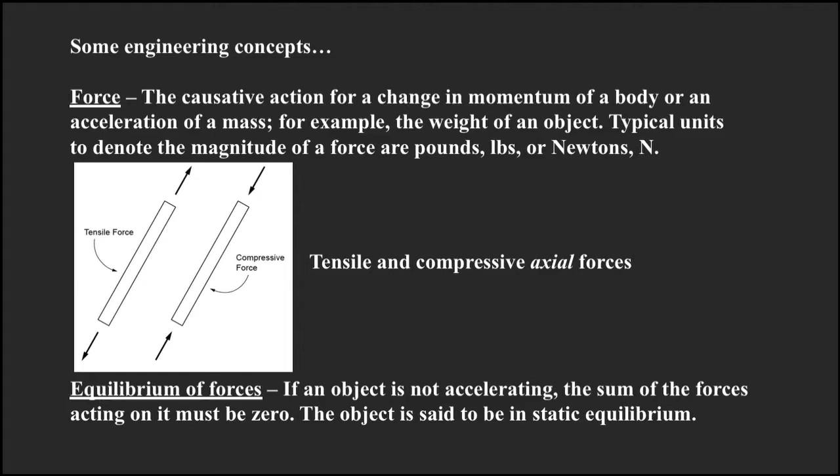A second fundamental concept is that of force equilibrium. By Newton's law, if an object is not accelerating, the sum of the forces acting on it must be zero. The object is said to be in static equilibrium.

The strength of a material generally depends on the intensity of an applied force, or the force per unit area. Stress is a force divided by the area over which it acts. Typical units are pounds per square inch, or PSI, or newtons per meter squared, or pascals.

Stiffness is an increment of force divided by the corresponding increment in displacement. Typical units are pounds per inch or newtons per meter. For example, if I apply an axial force of 5 pounds to this rubber band and it stretches 2 inches, then the stiffness of the rubber band is 5 divided by 2, or 2.5 pounds per inch.

Frequency is the rate of vibration, typically given in cycles per second or hertz. For example, the musical note middle C corresponds to a frequency of 262 hertz.

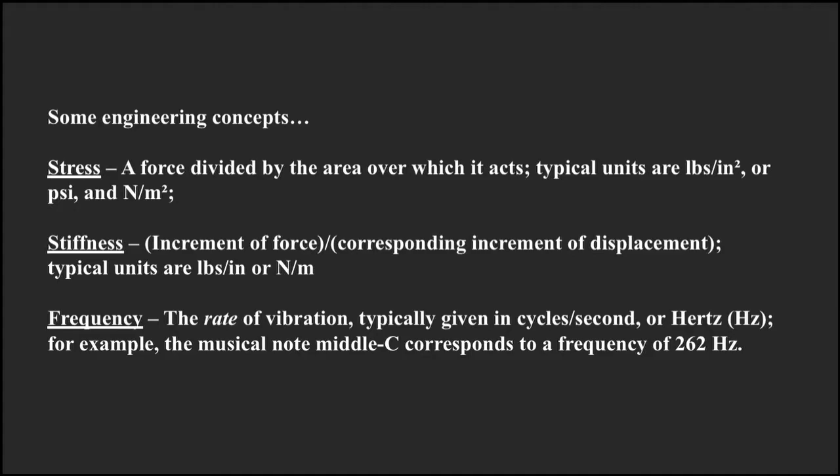Prestressing can generally be described as follows: prestressing means deliberately inducing a self-equilibrated state of stress in an object before it is placed in service.

There are many possible reasons for wanting to prestress a structure. For one, prestressing may be essential for functionality. Prestressing can improve performance by increasing stiffness, frequency, or controlling cracking. Prestressing can simplify connections. Prestressing can preclude force reversals in members and allow use of tension-only cable members or compression-only contact members. Prestressing can decrease material usage and improve the efficiency of a system.

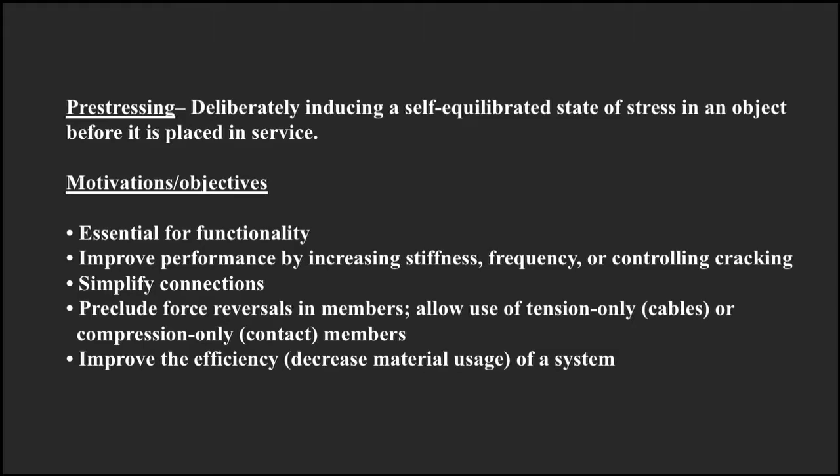Many common objects are prestressed. The blade in a traditional bow saw is pretensioned to increase its out-of-plane stiffness, generally done by twisting a rope. The net of a tennis racket is prestressed in two directions to increase its stiffness when hitting a ball. For that matter, the surface of a tennis ball is prestressed in tension by its interior air pressure.

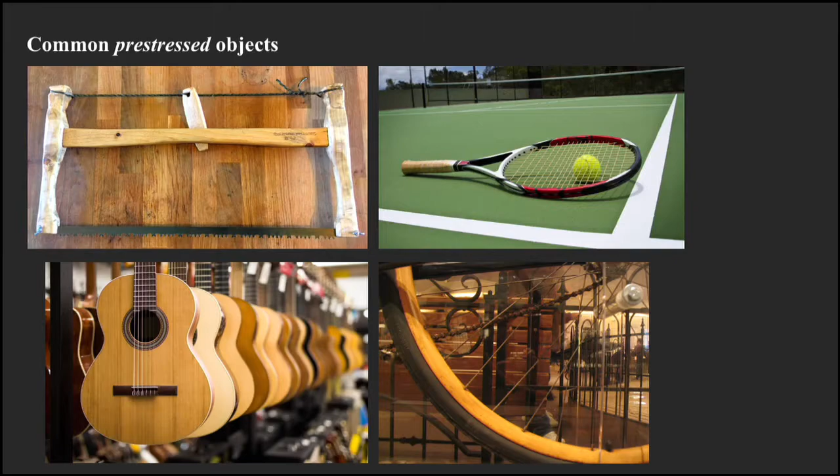Strings in musical instruments are also pretensioned to have the desired frequency or pitch. Similarly, drum membranes are prestressed to have the desired pitch. Tents are prestressed so they can form a space; prestressing is essential for the functionality of tents. And of course, common barrels with wood staves are prestressed by circular steel hoops to seal them against leaks.

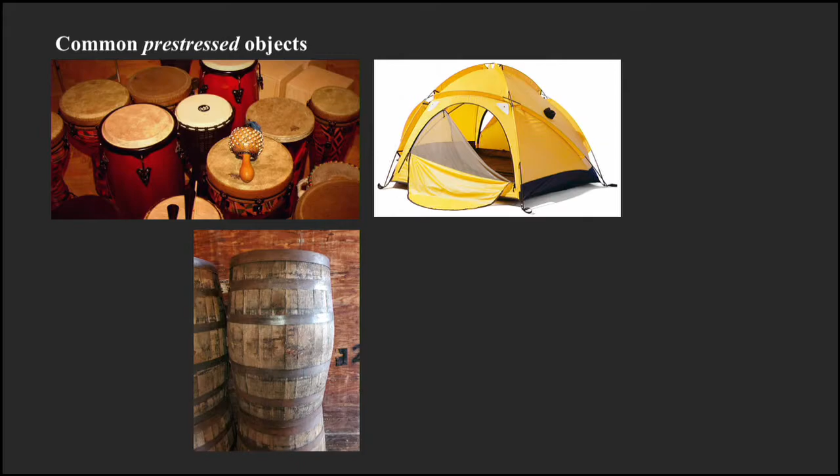In general, prestressing may be achieved by several methods, including pneumatically. Common examples include inflated balls, automotive tires, balloons, children's inflated play structures, inflated structures with an airlock for covering playing fields, pools, and so forth, or inflated pillows and tubular structures, as shown in this example in Osaka, Japan.

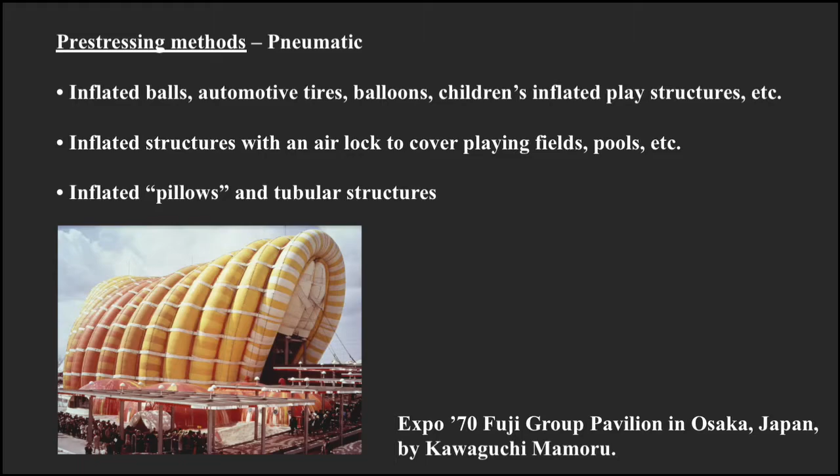Prestressing can also be achieved thermally. Tempered glass is processed such that the surfaces of a sheet are prestressed in compression while the interior is prestressed in tension. This greatly increases glass strength because the surface compression decreases the sensitivity of the strength to surface scratches.

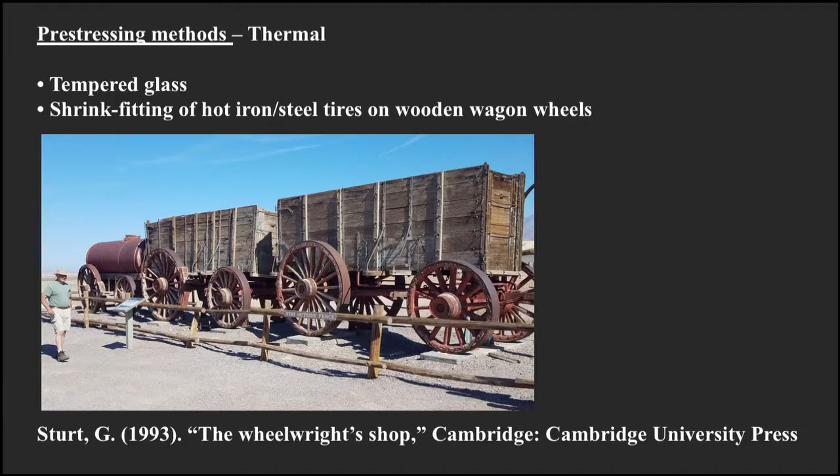A third example of prestressing thermally are U.S. Civil War era cannons. Thomas Jefferson Rodman patented a process for making cast iron cannons that forced the inner surface of the bore to solidify first.

As the solidification spread radially outward, the inner surface was pre-stressed in compression. This pre-compression on the inner surface of the bore greatly increased the life and reliability of cannons.

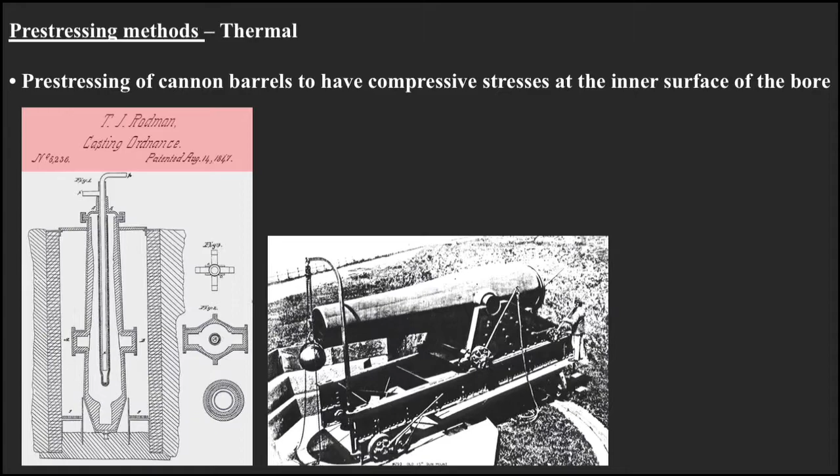An unusual method of pre-stressing is by using buckled elastic struts. The axial force that buckles an elastic strut increases slightly with increasing axial deformation.

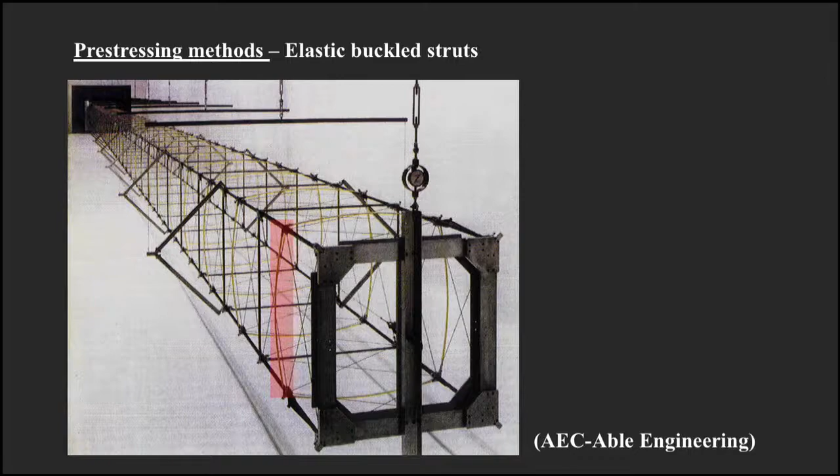As another example, tall wooden spires may be stabilized against overturning by wind by adding a weighted pendant.

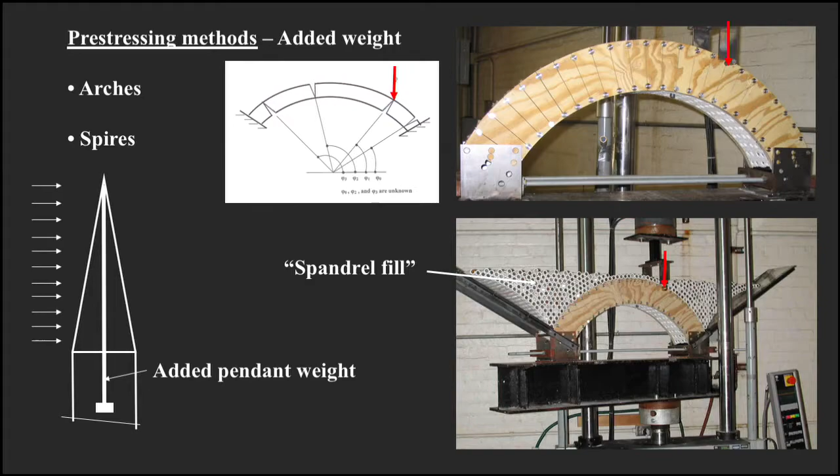There are 2 sets of lock nuts and bearing plates, one above the hydraulic cylinder and one below under a so-called bridge. The bar is tensioned by extending the jack piston. At the desired bar tension, the lower lock nut is tightened and then the hydraulic pressure is released.

Prior to hydraulic cylinders, pre-stressing was done by twisting ropes, inserting wedges, and later tightening nuts or turnbuckles. Examples reveal that pre-stressing was practiced throughout history in conjunction with most construction materials.

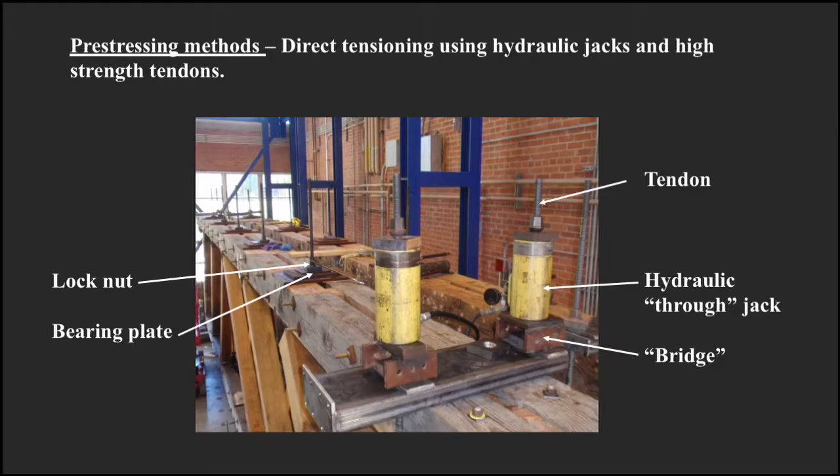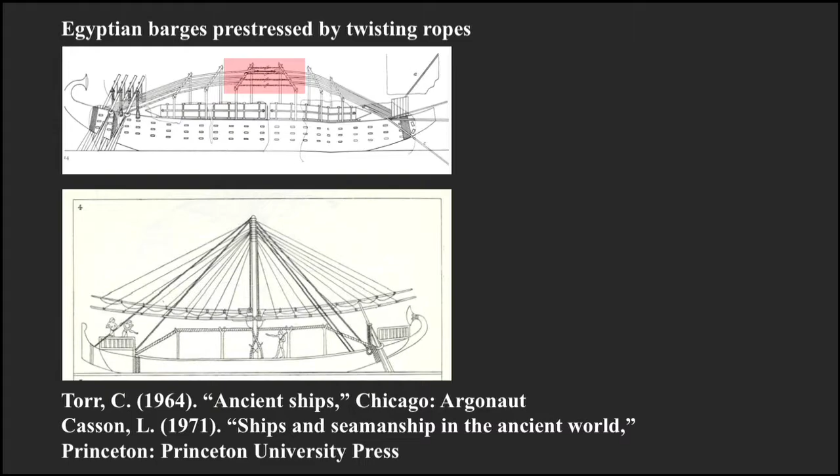Therefore, documents directed that pre-stressing should be done in warm weather, thus assuring larger pre-stressing forces in cold temperatures.

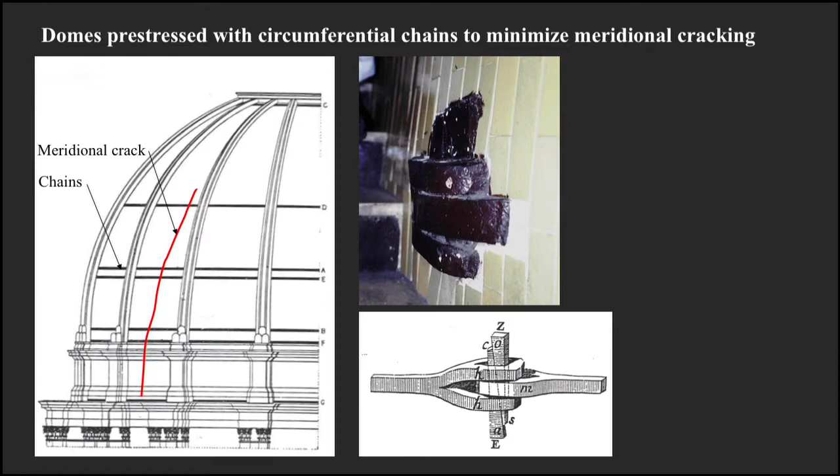19th century U.S. truss bridges commonly used pre-stressing. Three in particular were very significant: the patented trusses of Stephen Harriman Long, William Howe's patent truss, and Thomas and Caleb Pratt's patented truss.

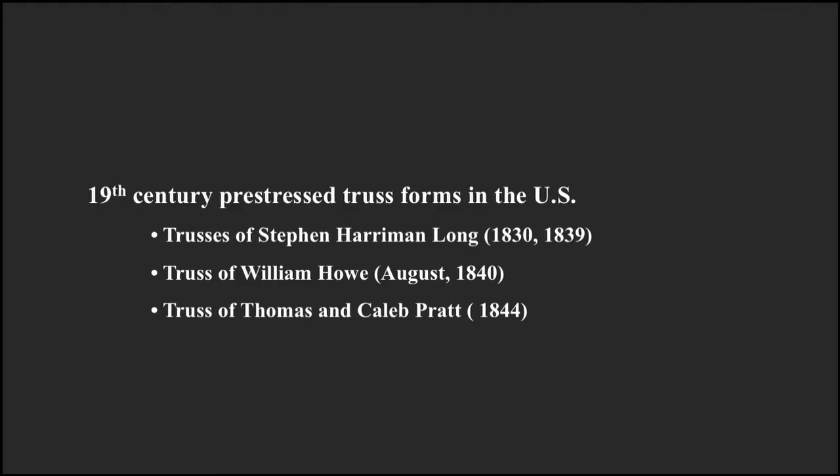Long's 1830 patented truss was all wood. He pre-stressed the truss by driving wedges at the ends of the diagonals, as indicated in the highlighted oval.

He thus caused compressive prestress forces, shown in red, in both diagonals, and tensile forces, shown in blue, in the verticals. The prestressing provided two distinct advantages. Long did not need to design any tension connections for the diagonals, and both diagonals contributed to the stiffness of the bridge.

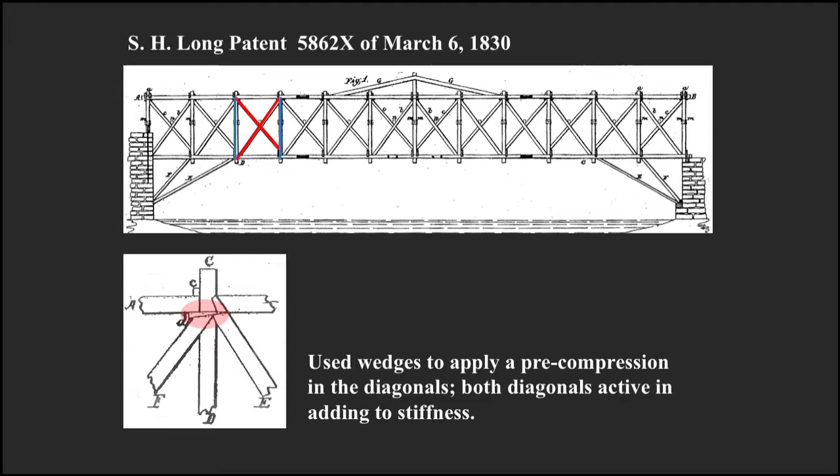In his U.S. patent number 1397, received in 1839, he prestressed the truss by driving wedges at the tops of the verticals, as indicated in the red oval. He thus achieved a prestress state opposite to that of his 1830 patent truss. The diagonals were prestressed in tension, as highlighted in blue, and the verticals were prestressed in compression, as highlighted in red. However, Long had to design effective tension connections for both diagonals, a relatively difficult task for wood.

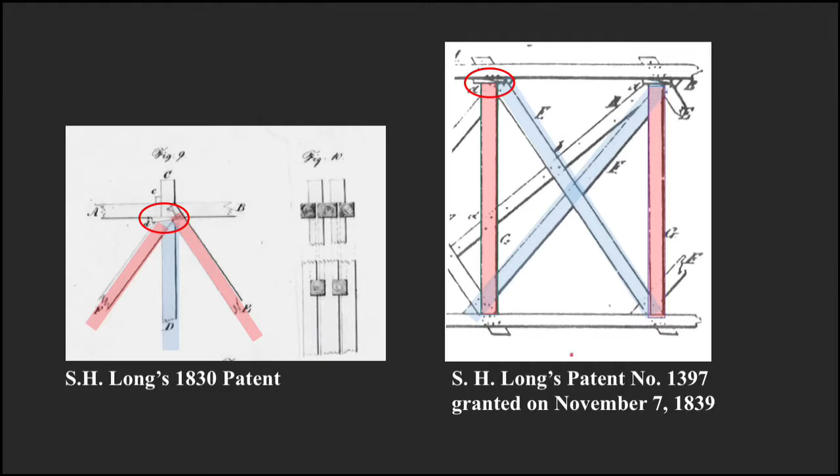Long's 1830 patent was made obsolete by the 1840 patent of William Howe, who introduced threaded wrought iron verticals and prestressed the truss by tightening the nuts. After a large-scale Howe bridge was completed over the Connecticut River in July of 1841, the Howe truss became the dominant form for U.S. railroad bridges.

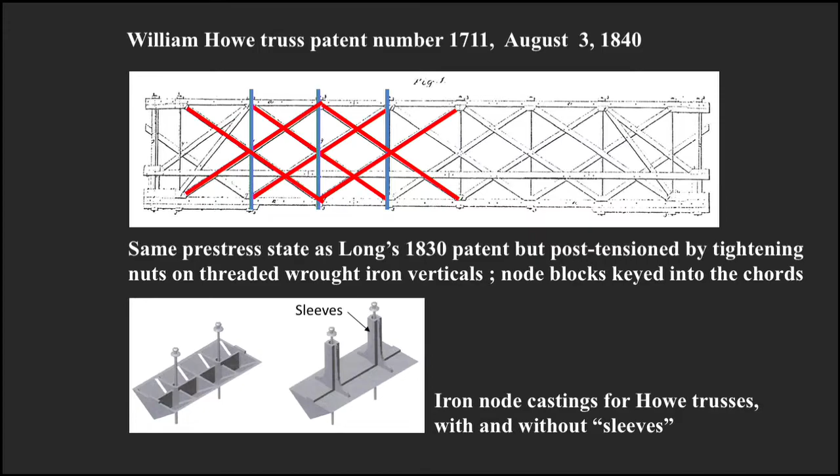In 1846, Howe received U.S. patent number 4726 for nodal castings with sleeves that eliminated stresses perpendicular to the grain of the wood chords, and thus markedly reduced prestress losses from time-dependent deformations in the wood chords.

This is an example of a post-tension Howe truss. The high-strength vertical steel bars are in tension. The wood diagonals are in compression without positive connections to the iron nodal castings. That is, the diagonals are contact members that can only act in compression.

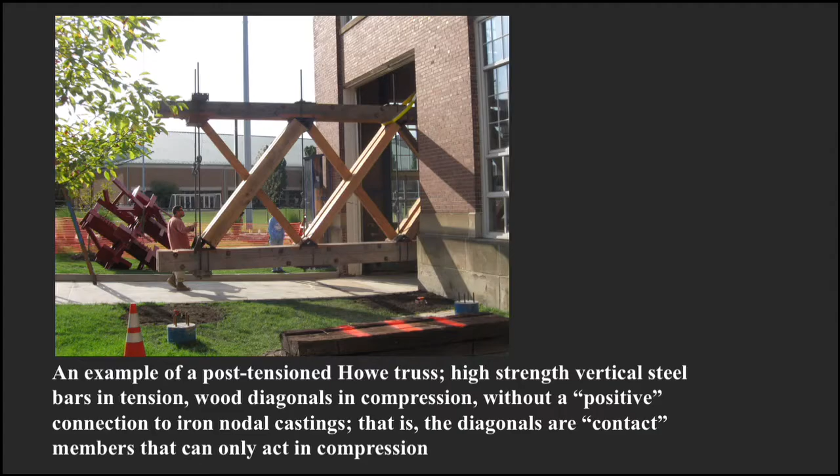In 1844, Thomas and Caleb Pratt received a U.S.

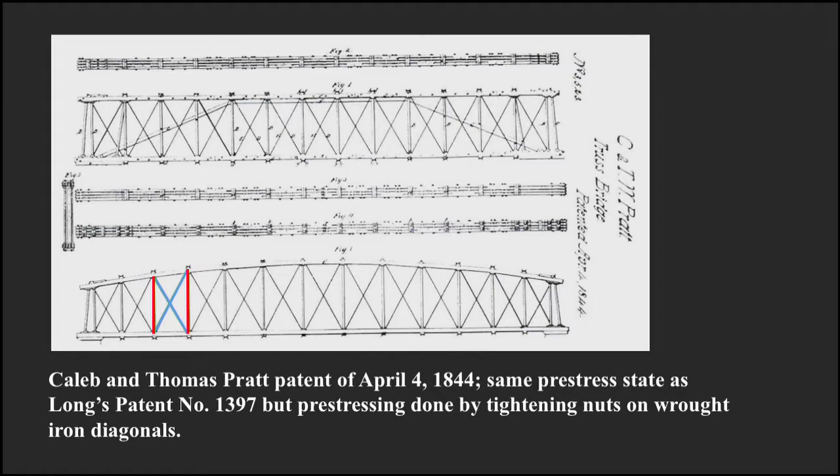Bridge patent that made Long's 1839 patented truss obsolete. The Pratts introduced threaded wrought iron diagonals and prestressed their truss by tightening the nuts on the diagonals. Therefore, the diagonals were in tension, indicated in blue, and the verticals were in compression, indicated in red. This was the same prestress state as that in Long's truss of U.S. patent number 1397.

By the late 19th century, the Pratt bridge truss was adopted by pioneers in flight. Octave Chanute and Augustus Herring built experimental gliders in 1896 and 1897 that were three-dimensional prestressed Pratt trusses. Wilbur and Orville Wright also adopted the Pratt truss for their flyers.

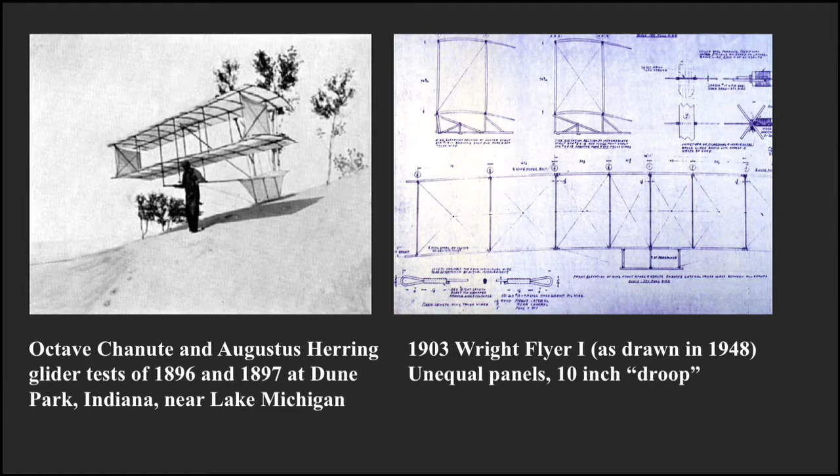It is beneficial to pretension the diagonals because the vertical stiffness of the wings is increased when both diagonals are active. Having both diagonals tensioned also avoids the nonlinearities that occur when some wires go slack, and hence the predictability and controllability of the machine are improved. Pretension diagonals have greater stiffness and a higher natural frequency, and very likely less vibration from airflow. The objective is to prestress sufficiently to preclude slack wires under all predicted loads.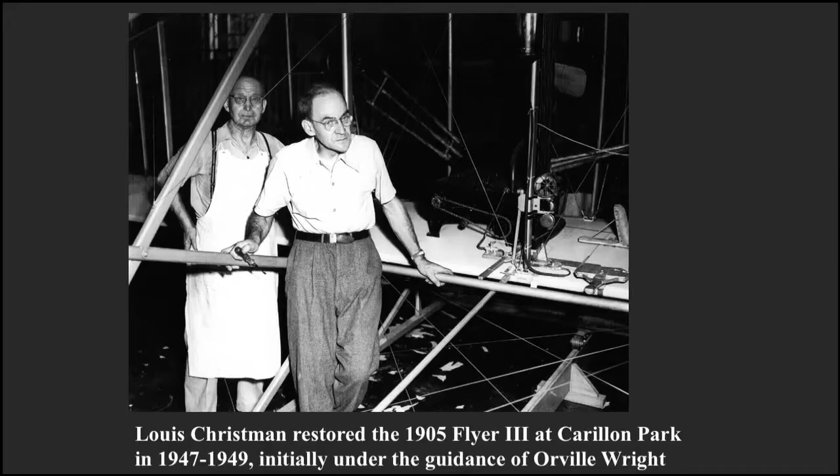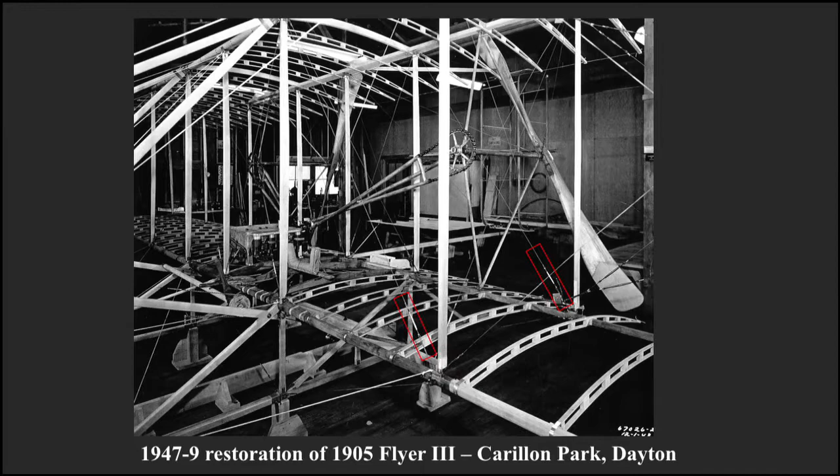The reconstruction of the flyer in Dayton was begun under the supervision of Orville Wright and completed by Louis Christman in 1949. The next photo, taken during the reconstruction, clearly shows inline turnbuckles highlighted by red rectangles.

A non-prestressed biplane will not function predictably. It is not possible to build a prestressed biplane without using adjustable length diagonals. The Wrights used adjustable length diagonals to establish geometry and pretension levels during construction. They then measured the exact lengths required and pre-made wires with soldered end loops. They installed the pre-assembled fixed-length diagonals by slipping the loops over hooks on the wings, and finally removed the adjustable wire diagonals.

Prestressing is a difficult, time-consuming, iterative process. The Wrights had to disassemble and transport their planes from Dayton, Ohio to Kitty Hawk, North Carolina for flight testing. To facilitate the reassembly with the correct pretension, they substituted the fixed-length diagonals.

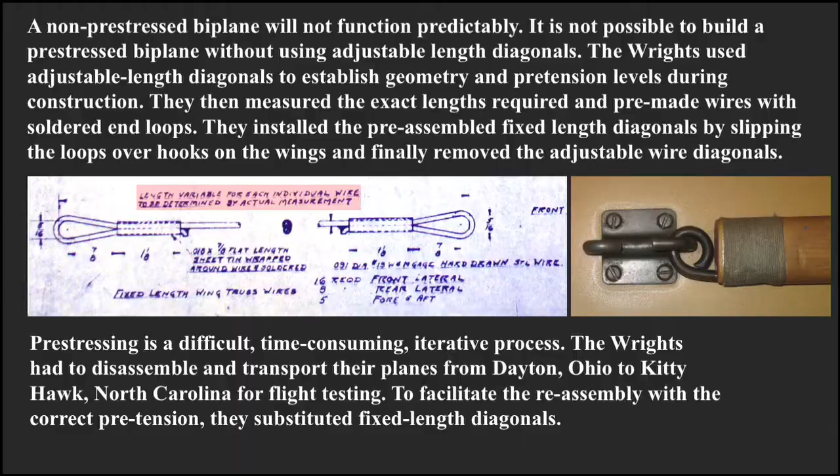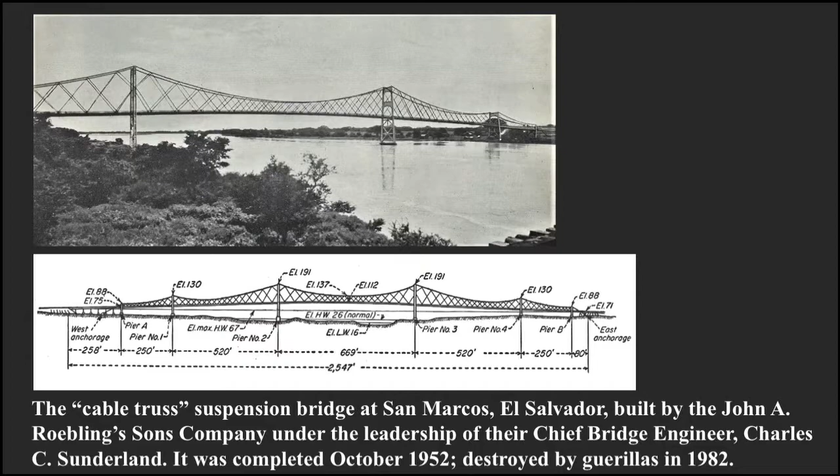Prestressing often permits replacement of most compressive members in a structure with very efficient, high-strength tensile members. An outstanding example is the cable truss suspension bridge at San Marcos, El Salvador, designed, fabricated, and erected by the John A. Roebling Sons Company of Trenton, New Jersey, under the leadership of their chief bridge engineer, Charles C. Sunderland. It was completed in October 1952.

The bridge was pre-stressed by stretching the bottom chord, which was a bundle of 8 Roebling bridge strands. Because of the pre-stressing, it was possible to use high-strength cables for all the diagonal members. Ingeniously, the lower chord was anchored into the deck. Thus, its tension was equilibrated by compression in the concrete deck.

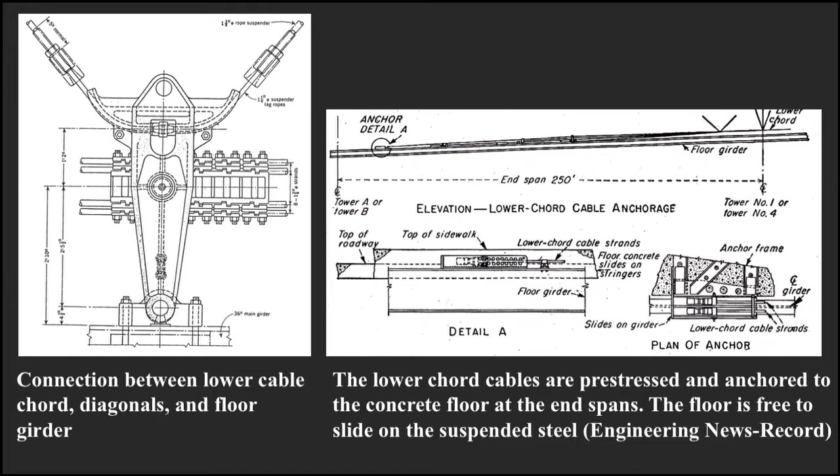But structural engineers often associate pre-stressing primarily with concrete. Pre-stressed concrete technology developed in the 1920s and 1930s largely in Europe, largely by European engineers. A principal objective was to minimize tensile stresses in concrete and hence minimize cracking, which then led to greater stiffnesses. Two basic processes were developed.

One is called pre-stressing. The steps are to first stretch tendons between bulkheads, then cast and cure a concrete member. The tendon and concrete bond as the concrete cures. After sufficient curing, the tendon is cut. As it tries to contract, it pre-stresses the concrete.

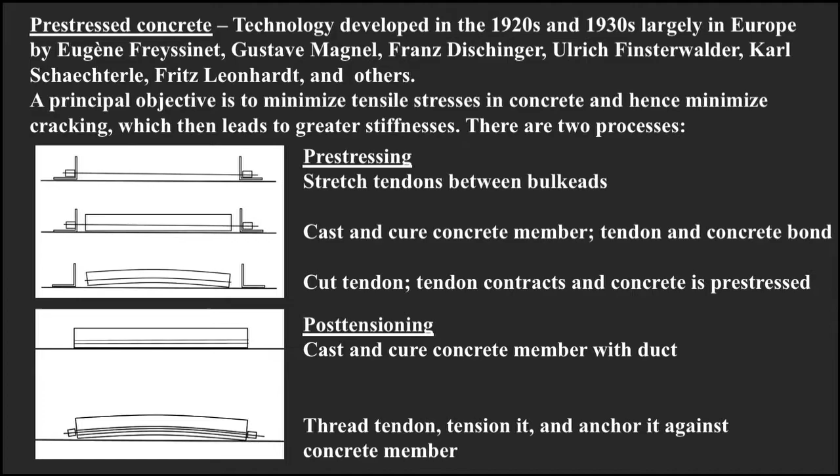The second is called post-tensioning. The first step is to cast and cure a concrete member with a duct. Then a tendon is threaded, stretched, and anchored against the concrete member, which pre-stresses the concrete in compression.

In the United States, J.M. Crom and the Preload Corporation built pre-stressed concrete tanks beginning in 1931. The John A. Roebling Sons Company began research on post-tension concrete in 1944. They built and tested a 1/10 scale model of a 200-foot-long post-tension concrete bridge consisting of 5 segments.

Pre-stress losses and displacements were measured for a 3-year period. Their principal observations were that time-dependent deformations of concrete caused some pre-stress losses and increased displacements, but that a permanent pre-stress state could be achieved, and that increases in displacements after the first year were negligible.

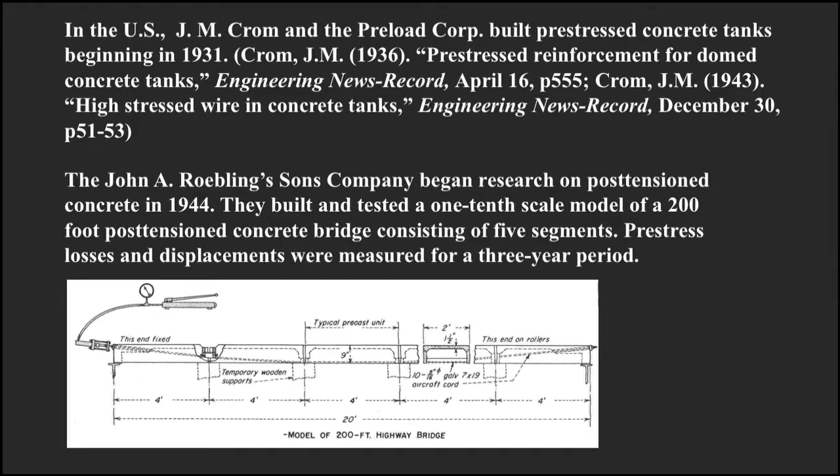An unreinforced slab 9 inches thick was cast on sand. A layer of paraffin wax was applied, and then a 3-inch thick top slab was poured and cured. In October 1946, the top slab was post-tensioned in two directions, inducing a compressive stress of about 700 pounds per square inch in the concrete. The concept was that the pre-stressed slab would float over the base slab and remain uncracked.

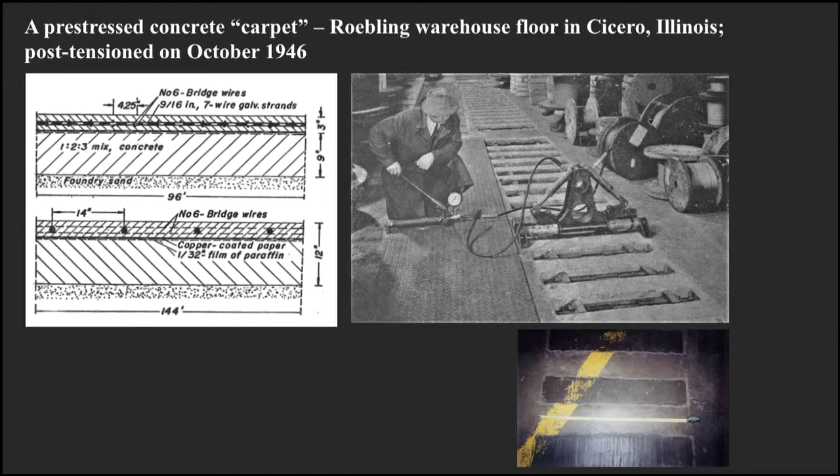The former Roebling warehouse is currently a self-storage facility. In 2007, the parts of the floor that were visible were crack-free. The floor is without doubt the oldest pre-stressed floor system in the United States.

The Roebling Company applied their post-tensioning technology on several of the bridges that they designed, fabricated, and erected. One was the Rio Paz suspension bridge between Guatemala and El Salvador, completed in 1949. The floor of the bridge was precast in 21-inch by 21 feet 7-inch modules. The modules were then post-tensioned along their lengths and then post-tensioned together longitudinally. The Rio Paz bridge is extant, but I am uncertain whether the deck is still the original one.

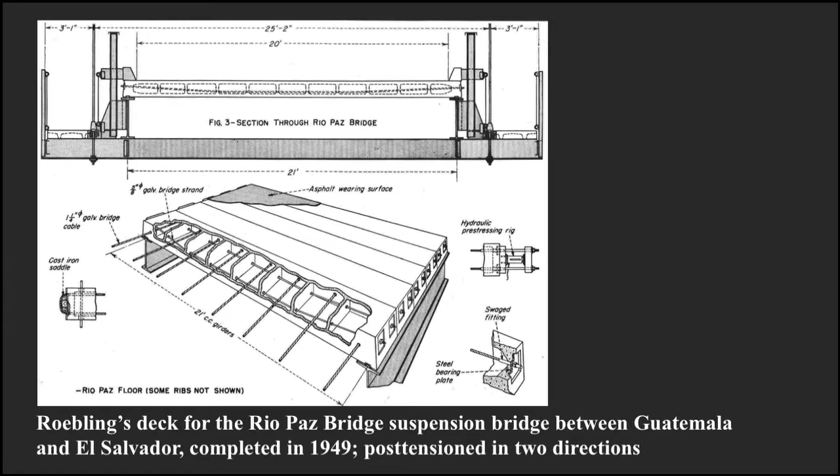Roebling concrete post-tensioning technology and products inspired other bridge engineers. Ross Bryan in Tennessee and C.L. Johnson in Michigan built block bridges in 1950 using Roebling post-tensioning products. These small block bridges augured the birth of an important new bridge building technology called precast post-tensioned segmental construction.

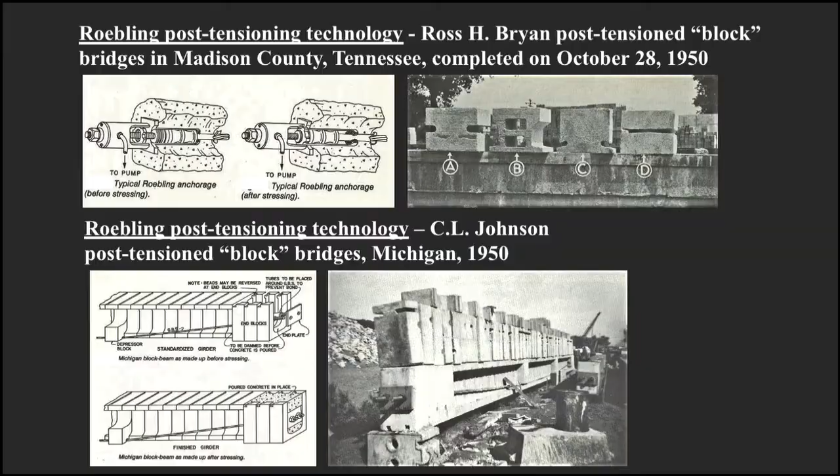On the left is an image of the engineer Jean Müller when he was employed by the New York office of the Freyssinet Company. He designed two small pre-stressed bridges for Wyoming County in New York State. On the right is the Griffith Road crossing of East Coy Creek. The bridge was built in 1953 by match casting 4 segments of a beam and then post-tensioning them together.

Post-tensioning segments together may be demonstrated by a simple toy. It is made of beads or segments that are threaded together. The thread is tensioned by a spring in the base. If the thread tension is released, the toy collapses. If the thread tension is reapplied, the toy becomes stiff.

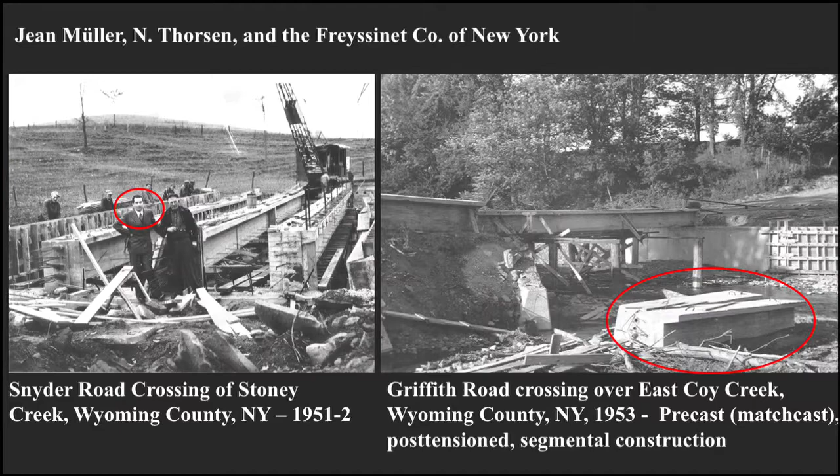This concept has been used to design truly remarkable, very large-scale structures. On the left is an image of the Confederation Bridge, which spans the 13-kilometer wide Northumberland Strait between the Canadian provinces of New Brunswick and Prince Edward Island. It was designed by J. Müller International and completed in 1997 using precast post-tension segmental concrete construction.

The image on the right shows the individual segments that were precast to form one of 43 main spans. The main girder is 192.5 meters or 630 feet long, and the drop-in segment has a span of 60 meters or 197 feet. The largest segments weighed 7,500 metric tons.

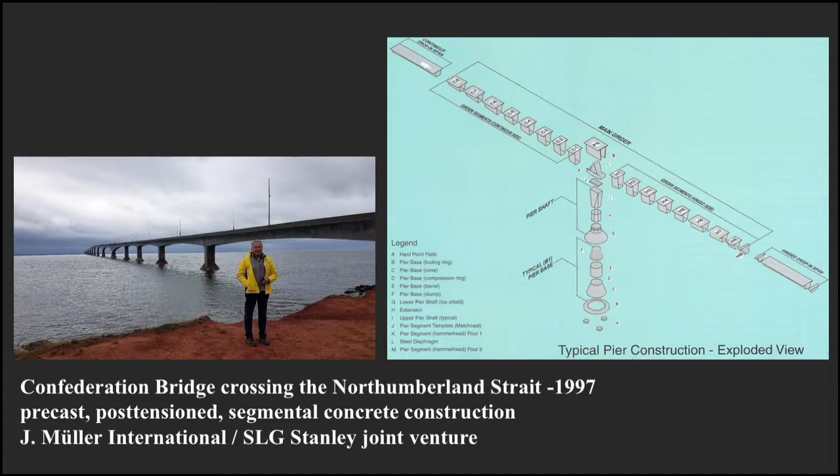A sense of the scale is provided by one of the smaller segments that is displayed in a bridgeside park on Prince Edward Island. The segments were post-tensioned together using very high-strength steel tendons. The image on the right shows the ducts for the tendons.

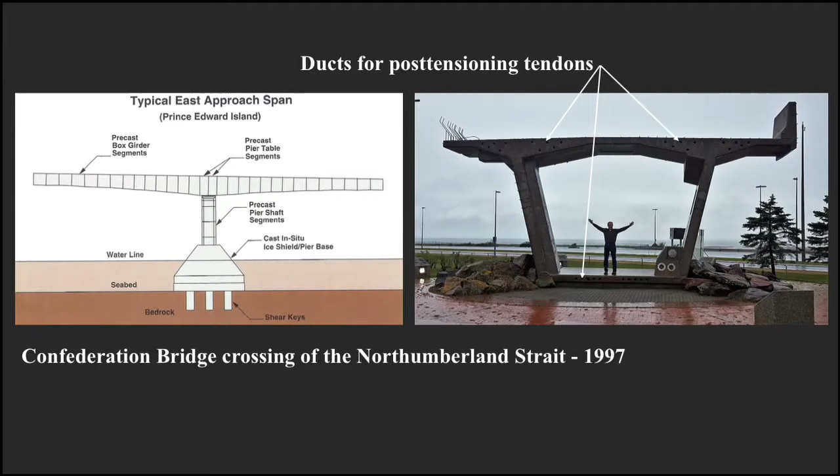A better understanding and appreciation of pre-stressed structures may be gained by briefly considering the engineering issues that arise during engineering design. One of the most important steps is to create a mathematical model that can be used to predict forces and deformations in every part of a structure from combinations of the pre-stressing action and various design loads. This is known as performing a structural analysis.

With computers, it is a relatively straightforward step if a linear mathematical model is acceptable. However, if a nonlinear mathematical model is necessary, this step is much more difficult. Engineers must be aware that time-dependent or viscous deformation in pre-stressed materials can significantly decrease effective long-term pre-stress. Such losses need to be estimated and minimized.

Given a set of functional requirements, there can be alternate structural forms that allow pre-stressing. Engineers must decide on which one to use. Engineers must define simple, effective, and safe pre-stressing processes for erection. This is often very challenging. Engineers must design stable pre-stress systems that have a known adequate stiffness and strength.

And finally, in some cases, there is a prior challenging step that must be performed. It is finding the actual shape or form or geometry that can satisfy equilibrium and meet functional requirements.

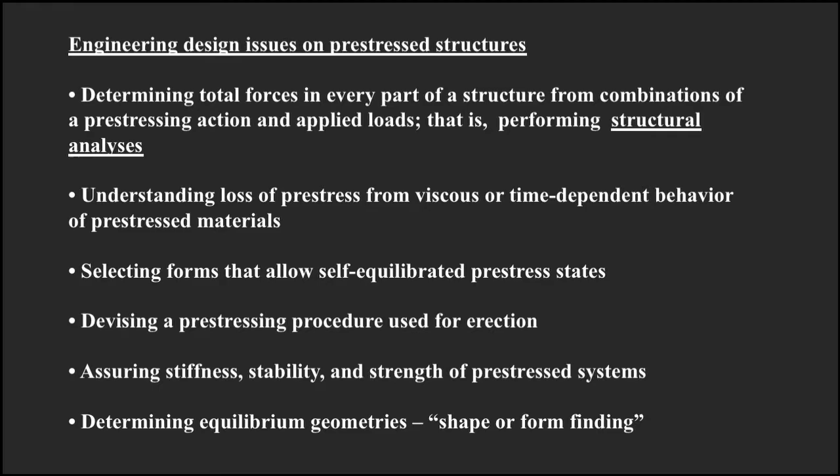For the primary task of structural analysis of pre-stress systems, it is historical that John Butler Johnson, Charles Bryan, and Frederick Turneaure published an elegant, correct method for the great pre-stressed wheel built for the 1893 World's Columbian Exposition in Chicago. Invoking only symmetry and superposition, they correctly determined that if the cable spokes were pre-stressed with a tension equal to twice the weight of one fully loaded gondola, then the spokes would always remain in tension even while directly above the hub.

Their analysis may be the first time that the pre-stress required to preclude slackness in a system was determined analytically by U.S. engineers. Their analysis was linear in the sense that equilibrium was invoked in the original geometry of the wheel.

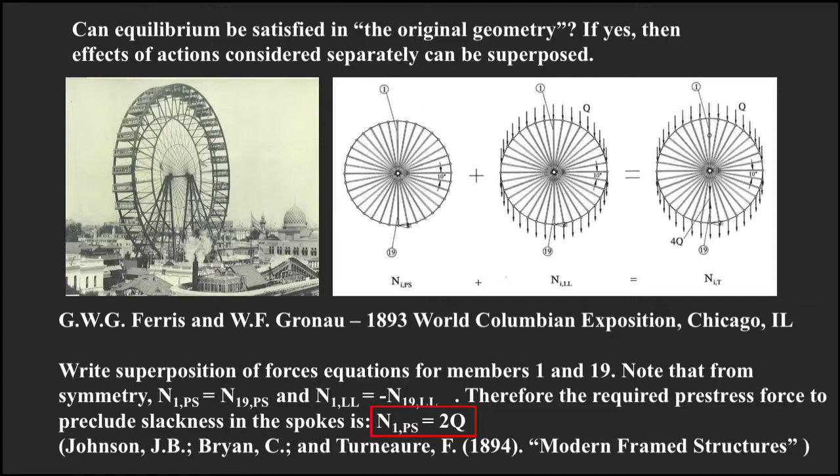But pre-stressed systems often cannot satisfy equilibrium in the original undeformed geometry. The most fundamental example of this is a tightrope. If a vertical weight or load is applied to a tightrope with pretension T, equilibrium can only be satisfied in a deformed or displaced geometry. A nonlinear structural analysis is required, and such an analysis yields several insights on structural behavior.

For one, the initial vertical stiffness of the tightrope is proportional to the pretension, T. The tightrope frequency is proportional to the square root of the tension, and the stiffness increases as the weight increases.

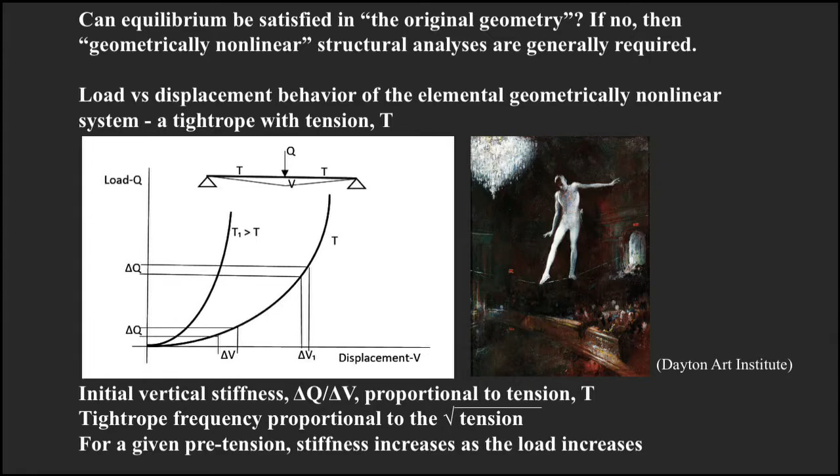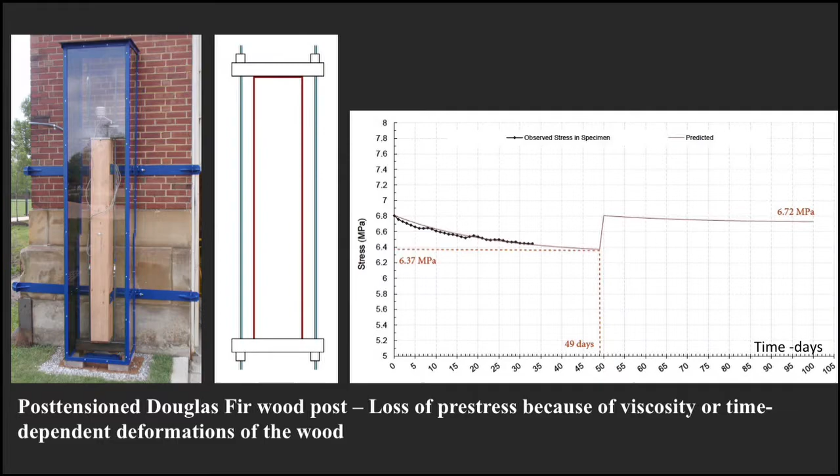Often, there are alternate structural forms that meet functional requirements and that allow states of self-stress. Shown are two planar networks that allow states of self-stress. They may be distinguished by considering each joint as a point with a concurrent set of member axial forces. Each joint must satisfy two equilibrium equations.

The number of unknown forces in the system on the left is less than the number of joint equilibrium equations. It is sometimes called a hypostatic system. The number of unknown forces in the system on the right is greater than the number of joint equilibrium equations. It is sometimes called a hyperstatic system.

Both systems can be pre-stressed to have only tension forces in the cable members, but the stiffnesses of the two systems will be different, and they will carry imposed joint gravity loads very differently.

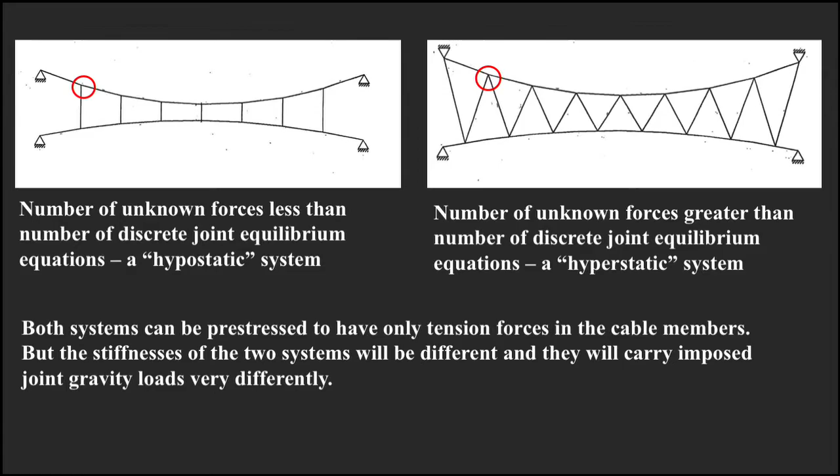Structural engineers must sometimes decide whether to use hypostatic or hyperstatic forms. Two large stadium domes exemplify alternate decisions. The engineer David Geiger chose to use a hypostatic form for his 1989 Tropicana field design, whereas Matthys Levy from Weidlinger Associates chose a hyperstatic form for his Georgia dome. Both domes had very large pre-stress forces in the millions of pounds in the members.

Prestressing is often a dangerous process. 3 persons died during prestressing operations for David Geiger's dome for the Seoul, Korea Olympics. 1 person died and 2 were injured during prestressing operations for the Georgia dome.

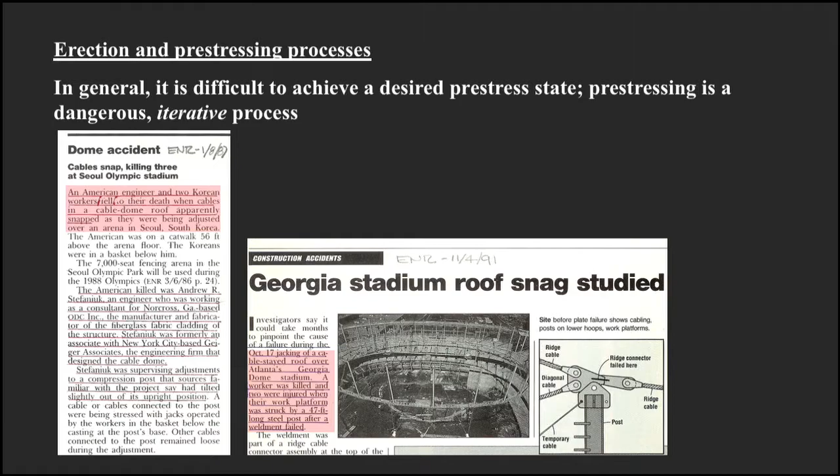When prestressing, it is important to confirm the out-of-plane stability and stiffness of planar assemblies. Shown are 2 planar assemblies. The top drawing shows a system that is prestressed so that the diagonal members are in tension, indicated in blue, and the vertical member is in compression, indicated in red.

The lower drawing shows a system that is prestressed so that the diagonal members are in compression and the vertical is in tension. Out-of-plane stability is a function of the position of the support of the vertical member. If stable, the out-of-plane stiffness is proportional to the pretension forces.

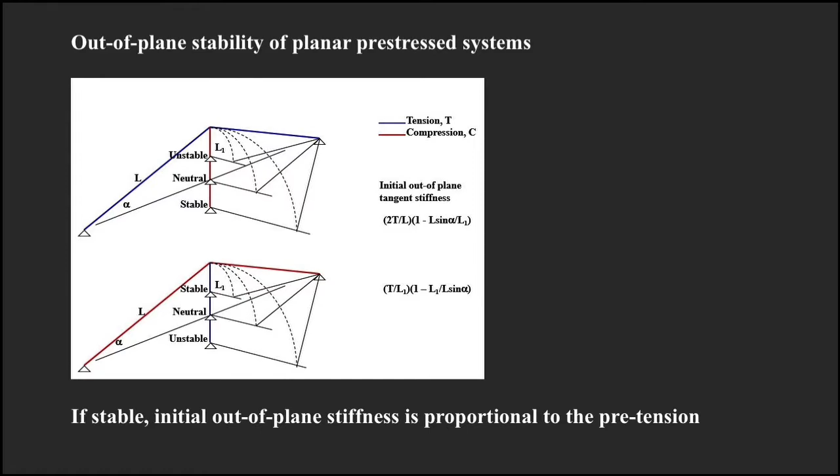2 examples of planar pre-stress networks are Peter Rice's famous cable truss mullions for the Grand Serre at La Villette, France, built in 1986, and David Geiger's radial trusses for his Tropicana field. Both are stable and stiff out of plane and did not need lateral bracing. On the left, Peter Rice is demonstrating the out-of-plane stiffness by jumping on a mullion.

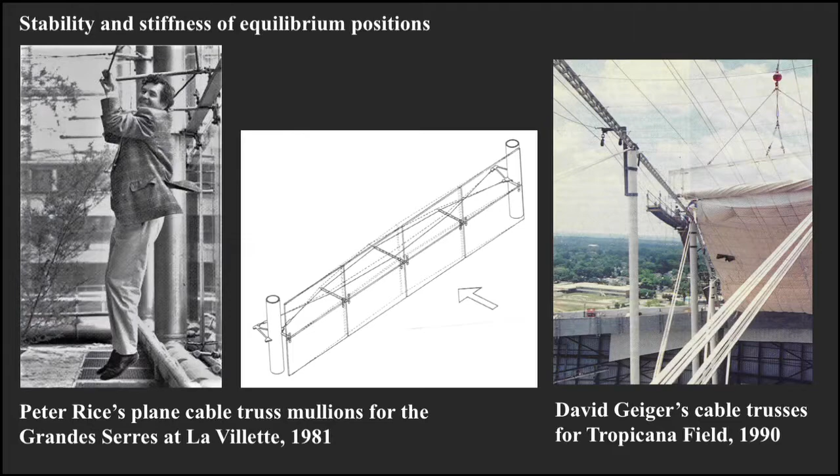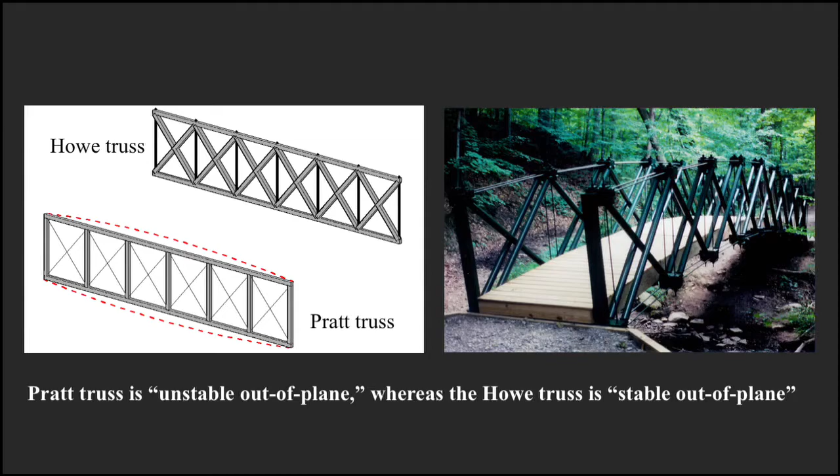It is often necessary to estimate the strength or capacity of pre-stress forms. The evident question is, does an initial self-equilibrated state of pre-stress decrease the maximum load that can be applied, that is, the load that causes a collapse mechanism in a structure. If the members and connections are ductile, an initial pre-stress state does not decrease the mechanism limit state capacity of a structure. This was shown by the Russian academician Alexei Gvozdev in 1938.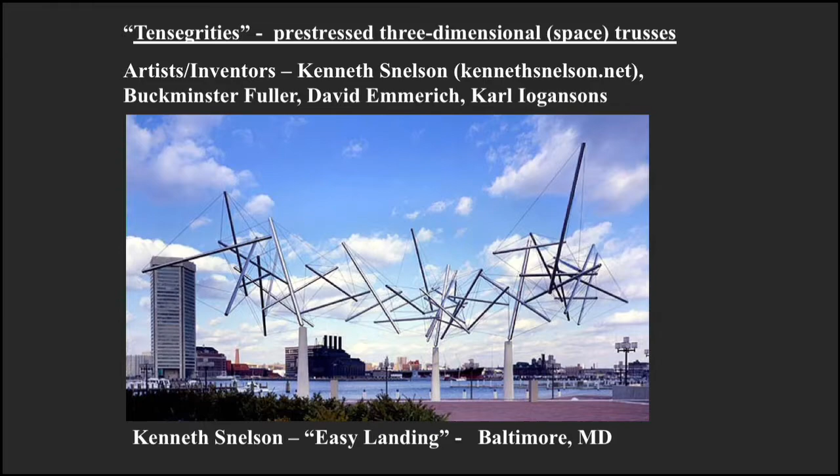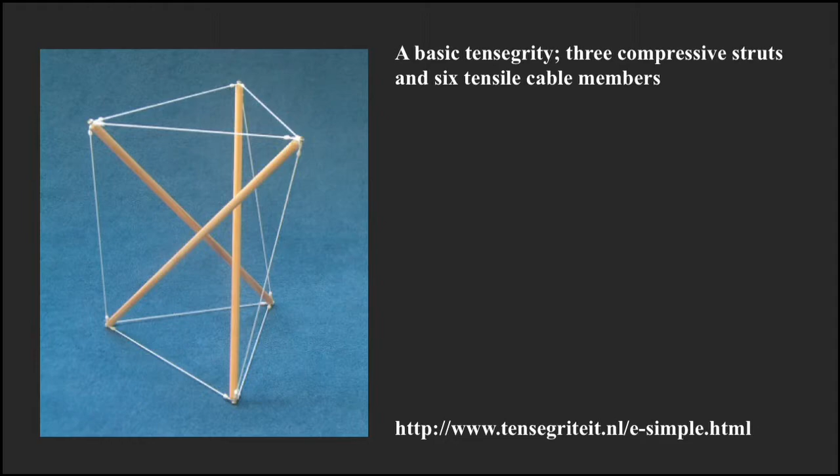In general, tensegrities are characterized by individual compressive members connected only to tensile cable members. Engineers have endeavored to understand the geometry and structural behavior of tensegrity forms, which are generally hypostatic. The most basic tensegrity is a 9-member truss that consists of 3 compressive members and 6 tensile cable members. Engineers understand the geometry of this basic form in the following way.

Say that the initial geometry is defined by the triangular prism shown on the upper left. The form is stiff and can satisfy equilibrium for an arbitrary load if rigid body motion is precluded by 6 appropriate restraints. The form cannot be pre-stressed in this original geometry.

However, say that the original geometry is deformed as follows. Rotate the top triangle, allowing only the diagonals to change length. Hold all other member lengths fixed. At a rotation of 150 degrees, the diagonals will have minimum lengths, and the truss can have a self-equilibrated pre-stress state, and in fact corresponds to the basic tensegrity form.

The truss stiffness will be proportional to the pre-stress forces. The fact that systems that allow states of self-stress often correspond to geometries where one or more members have maximum or minimum lengths was first observed by the scientist James Clerk Maxwell in 1864.

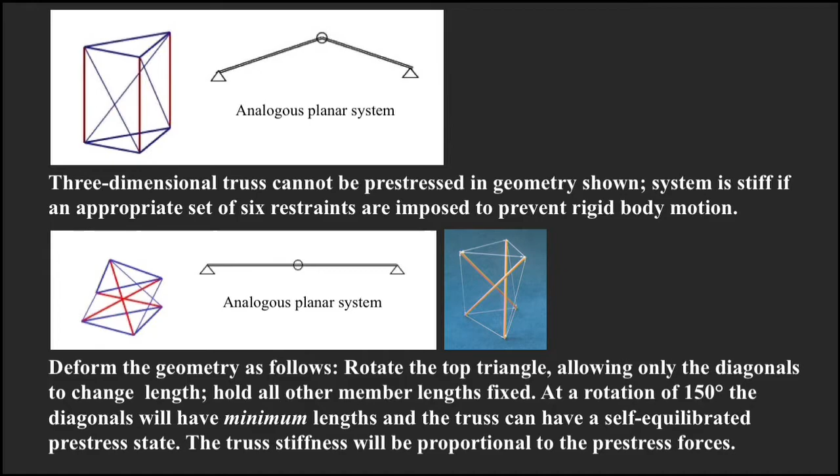Consider next a quadrilateral prismatic truss. The truss cannot be pre-stressed in the geometry shown. The system is not stiff if a minimum set of 6 restraints are imposed to prevent rigid body motion.

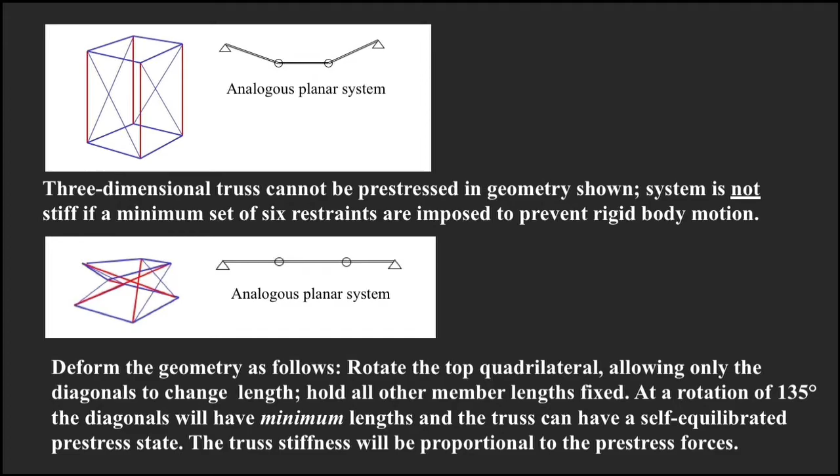However, deform the geometry as follows. Rotate the top quadrilateral, allowing only the diagonals to change length. Hold all other member lengths fixed. At a rotation of 135 degrees, the diagonals will have minimum lengths and the truss can have a self-equilibrated pre-stress state. The truss stiffness will be proportional to the pre-stress forces.

In general, consider an n-sided polygonal prism truss. It cannot be pre-stressed in the geometry shown. The system is not stiff if a minimum set of 6 restraints are imposed to prevent rigid body motion.

But deform the geometry as follows. Rotate the top polygon, allowing only the diagonals to change length, holding all other member lengths fixed. At a rotation of 90 degrees times 1 plus 2 over the number of sides of the polygon, the diagonals will have minimum lengths and the truss can have a self-equilibrated pre-stress state. The truss stiffness will be proportional to the pre-stress forces. An example of this geometry is Kenneth Snelson's VX tensegrity at the Columbus Museum of Art in Columbus, Ohio.

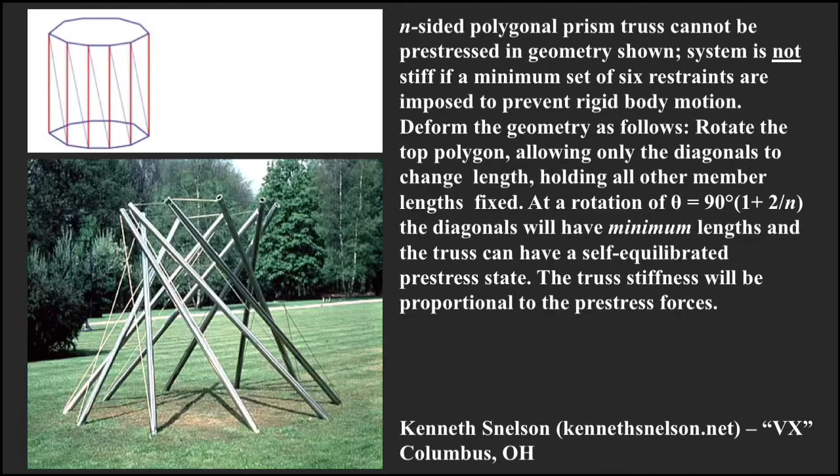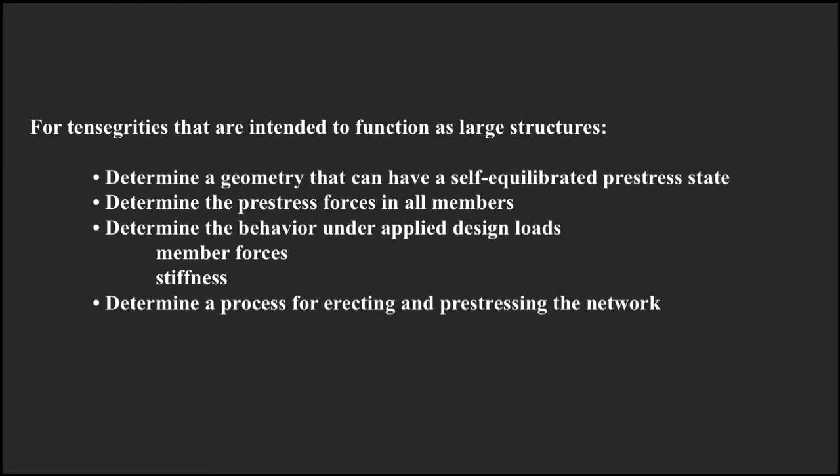But understanding geometries that allow states of self-stress is only the first step for structural design of large pre-stress structures. Engineers must determine the pre-stress forces in all members, as well as member forces and stiffnesses under the design loads. And engineers must determine a process for erecting and pre-stressing a network. Form finding and structural design of innovative structural tensegrity forms are active research areas.

A common methodology is to start with a network, which is generally hypostatic, and an initial geometry and member connectivity. Then computationally deform the initial geometry until a self-equilibrated pre-stress state exists, or until a quantity such as strain energy, member lengths, or surface area is minimized.